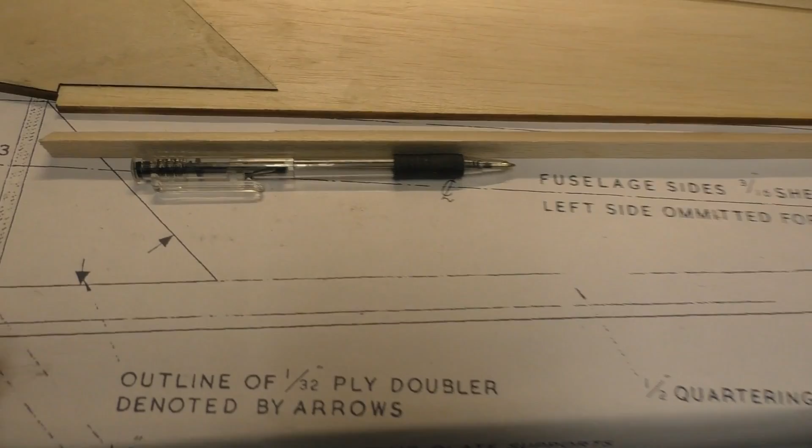Next thing on this fuselage sides, we've got to put on some triangle section. It's a mixture of half inch and 3/8 of an inch, and there are 2 different sizes in the kit, so don't get it wrong. Along the bottom here of this fuselage, you want some half inch triangle, which is shown here on the drawing - half inch quartering.

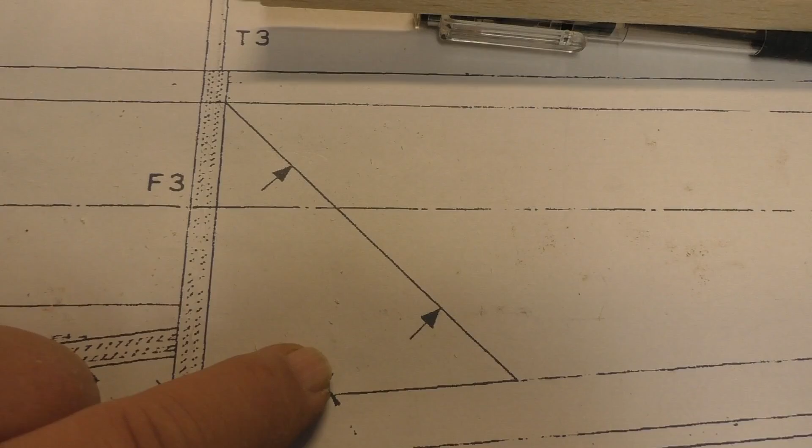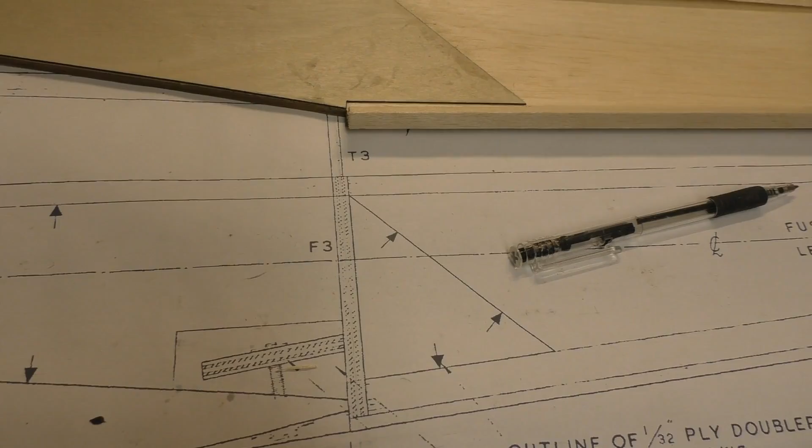Now there's a slight error - nothing major, but the cutout here in this ply doubler isn't cut out for half inch. So what we've had to do, if you look on the actual drawing, these arrows mark the outside of the doubler - it comes down there, along there, and down and around. You can see how much of a gap there is between the edge of the wood and the doubler, and here you can see it's different. So we just had to chop that much out of the triangle so that this is going to fit flush with the edge of this wood. Just by chopping that out, we've done that. Not a problem, just a little technical error in the re-kitting of it, one would presume.

Anyway, so we're going to stick some of this triangle on and then come back to you. But looking good so far - there we go, we ain't done much.

Back soon, never know, we might have the fuselage together today, Pete. I know, okay, it's getting closer to being in the shed, isn't it, mate? It is, it is, every day is one step closer to your shed loft. Shed loft, shed or loft, yeah. Let's get it built so I can put it up there. Exactly, back soon.

So Pete's gone home for lunch, we've been busy beavering away this morning. So there are the 2 sides, ready really to have the formers joined to them, and they're looking good.

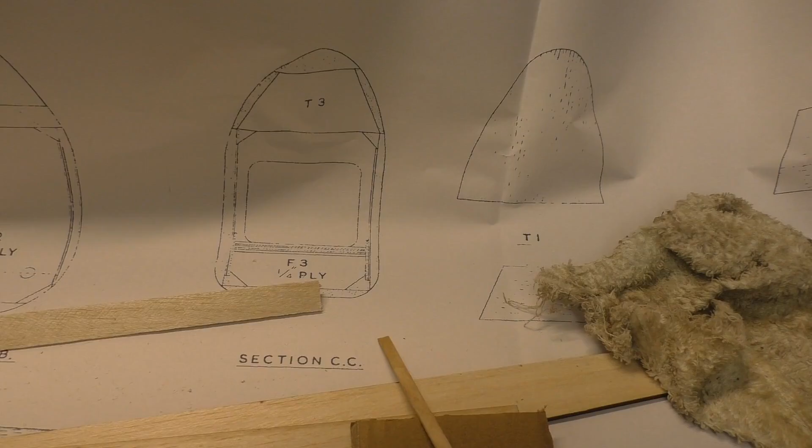Excellent, so it's the formers next - F1, F2 and F3. Got to do some drilling of former F1, obviously to mount the motor before we put it on there and stuff. So I'm going to get on with that. Back soon.

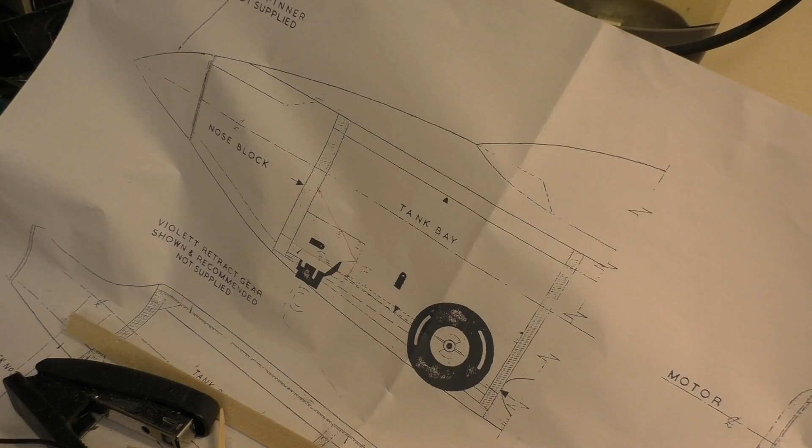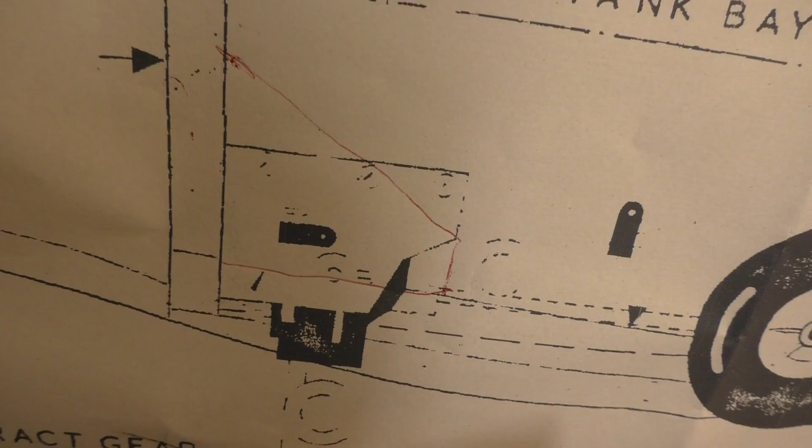Okay, so things are coming along quite nicely. We've got our motor mounted on the firewall temporarily, and that's our adjustable motor mount there. So the next thing we've got to do is look at the mounting of that retractable nose leg, because it's got to fit somewhere on there, and the actual mounting of it doesn't facilitate that.

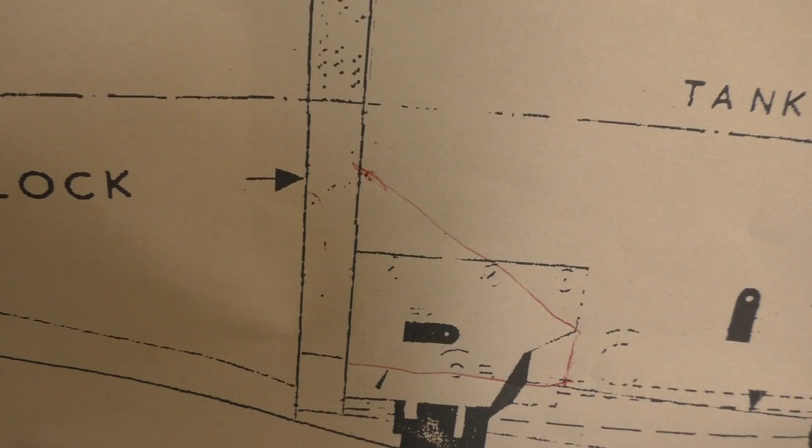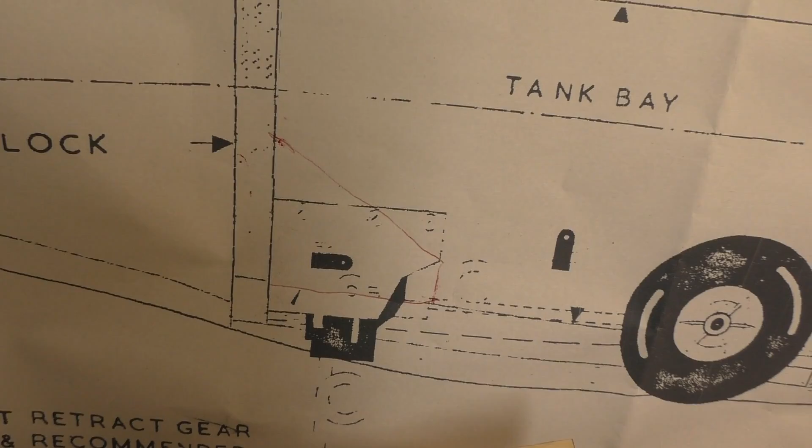So what we've got to do is make up a couple of gussets, and if you look here you can see I've drawn in red pen a shape, and we've got to cut 2 of those out that we can glue to the back of this firewall. We're just doing it all now to get it out of the way because it's easy while it's all in bits. So we're going to have to find some wood, some ply or something, and see if we can cobble that together.

Right, well, we've had a busy day, haven't we, Pete? We have. Not a lot to show for it. But intricate work, engineering. And this is the fruits of our labour for the day.

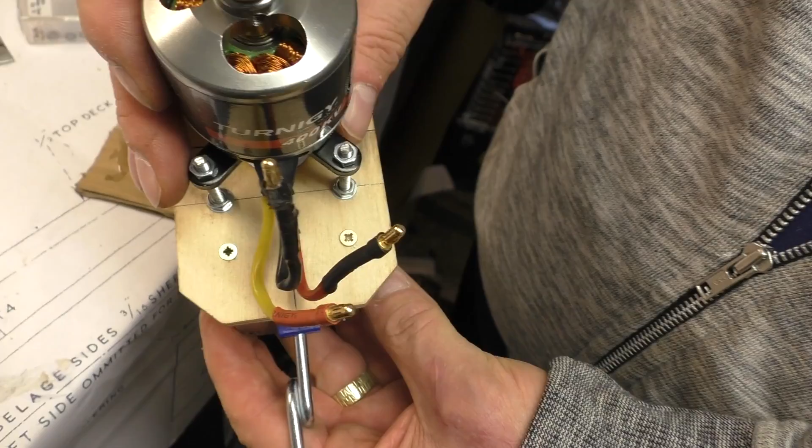Which is basically the front firewall with a bracket mounted on it for the nose leg. So yeah, we had to obviously make up a way of mounting the nose leg to the firewall, hence these blocks of wood, and we've glued this to the firewall. We've also screwed it as well, there's a couple of screws there, so she's going to be nice and strong.

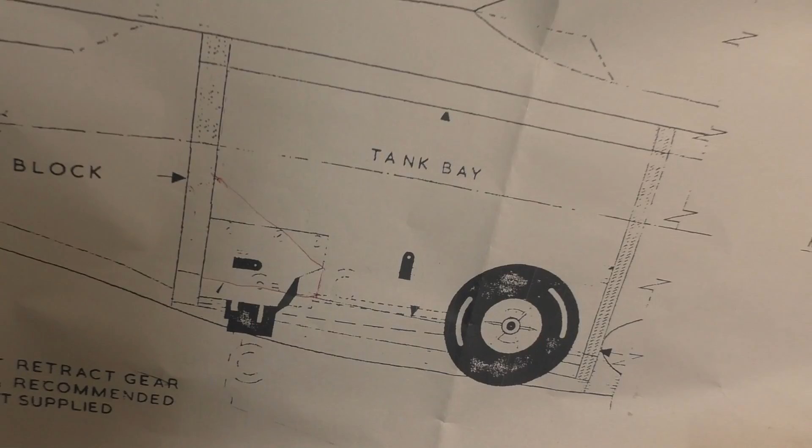Yeah, so that bit there is pretty much done. We're sort of ahead of the game and behind the game, because we've done the undercarriage mounting now, which you'd technically do later. We've done it now, so that's good. As you can see, we're using our standard adjustable mounting for the motor.

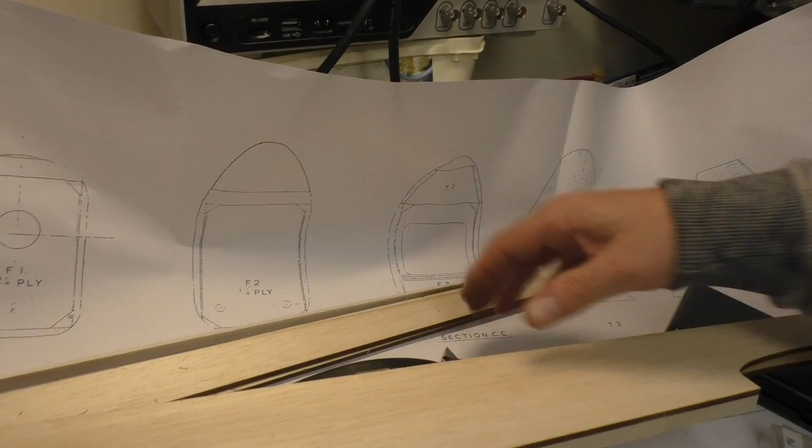So tomorrow I think we will be putting in the formers, like F1, F2 and F3, which is down there, isn't it, Pete? It is, yeah. I can't see why not, unless we suddenly realise something else isn't right.

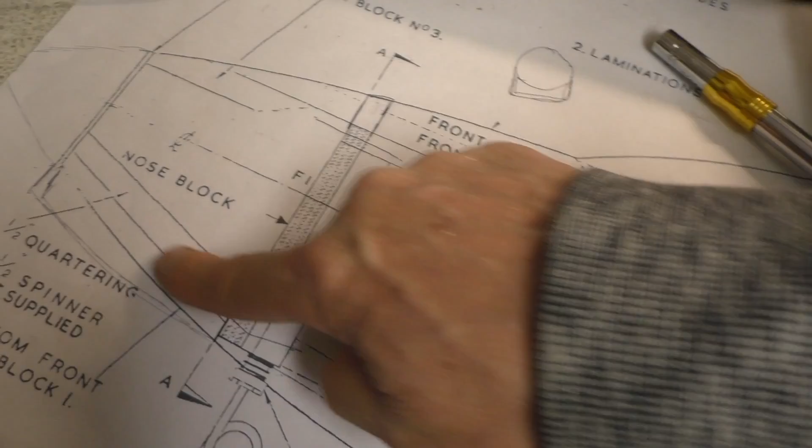Hopefully we'll get the fuselage glued together, or 90% glued together anyway. Then we've got to tackle the nose block. We're going to mount the ESC up in the nose as well, and modify the bottom with a bit of a scoop for cooling of the ESC. So it's going to mount up there, trying to get as far forward as we can.

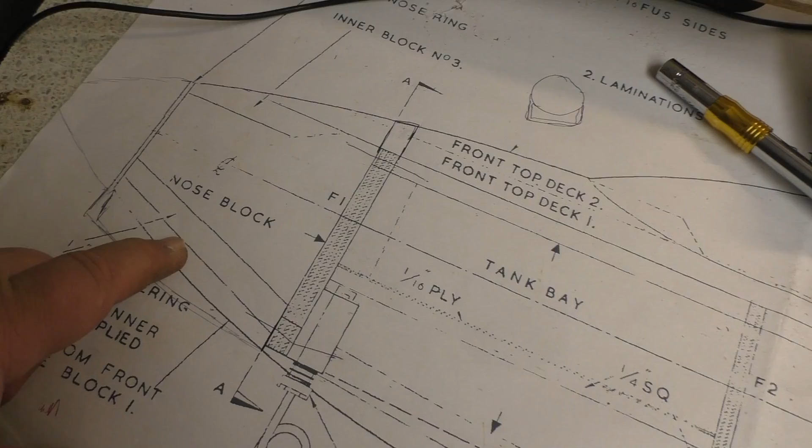So yeah, with a detachable nose, more than likely, like we did on the Bullet, with those bullet connectors. So you can pop it off, pop it on. Yeah, it's coming together, no big problems so far.

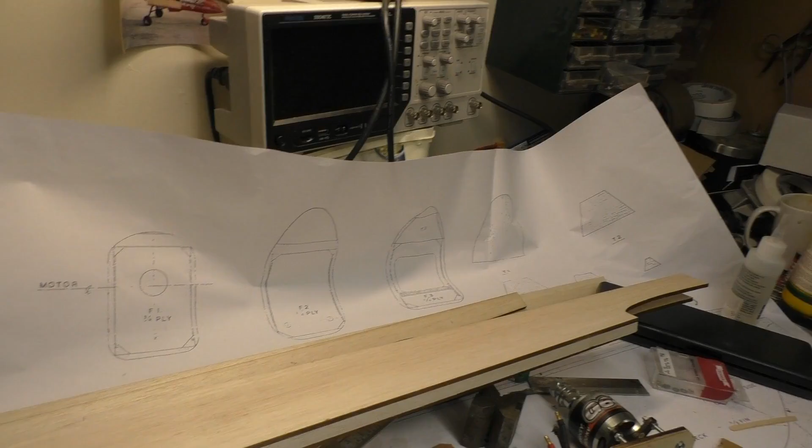I said it's a builder's kit, you know, you've got to have done your time to make one, you've got to freestyle it a bit. I've been trying to help you as much as I can.

Well, you're still learning. Oh no, I'm not going to tell them about your gluing incident. Actually, that was an interesting one. We glued all along here with superglue, and then just to make it nice and neat, I used a cloth to rub it down. As I was rubbing, my finger started burning. Yeah, the old rag nearly caught a light and started smoking.

Rob said, 'Oh, Pete, I wouldn't have done it that way.' I didn't know that putting a bit of cloth on with superglue and rubbing it gets really hot - and it was hot, and the fumes went mental. You burnt your finger, didn't you? I did burn my finger, had to have a little relax after that, I was picking at it all afternoon.

I wasn't on about that, I was on about when you came to stick this bit of wood on and it was wobbly, in the wrong place, had to cut it all off. I thought you were talking about the bit where it dripped onto the plan. Oh no, not that bit. Okay, we won't go into that bit then.

But we have been discussing the prop and the batteries today as well, haven't we? Yeah, working out RPMs, I think we're going 6X.

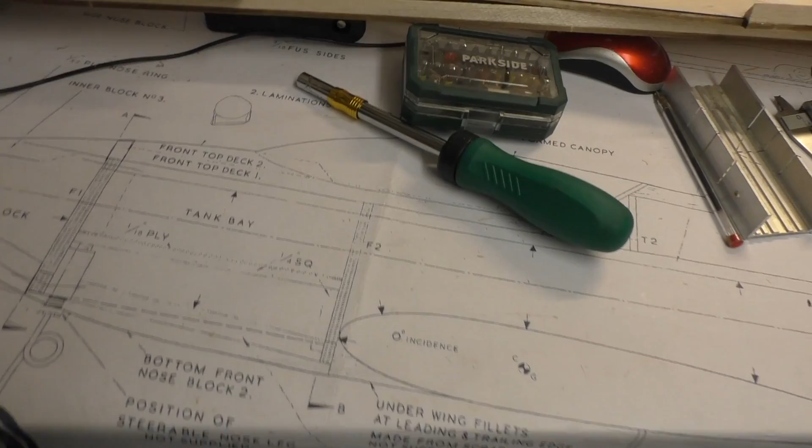6X, yeah, that was a lovely beer, that one, at Bishop's Tibble, a Firkin pub. Had 6X, HSB, Horndean Special Brew. Who knows about Horndean Special Brew? Anyway, that's why Pete and I are so slim. Is that right, Pete? Well, I was breathing in then.

Are we? Let me know when you're back on me again. Right, that's it, see you tomorrow for part 3, cheers all.